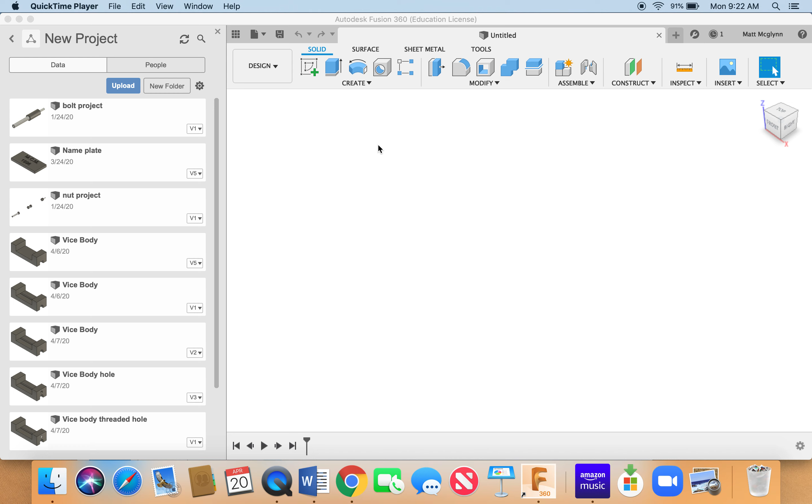I want you to open up Autodesk Fusion, go into Create, and create a sketch. We'll select our plane here and start with creating a circle - a center diameter circle, 0.5 inches in diameter.

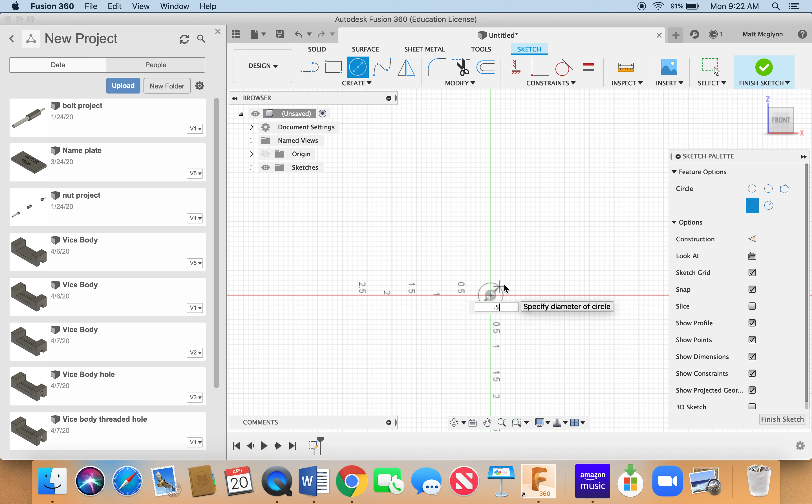Once we have that done, we're ready to create something solid here. We're going to extrude that out 1 inch. Now we should have our circle here.

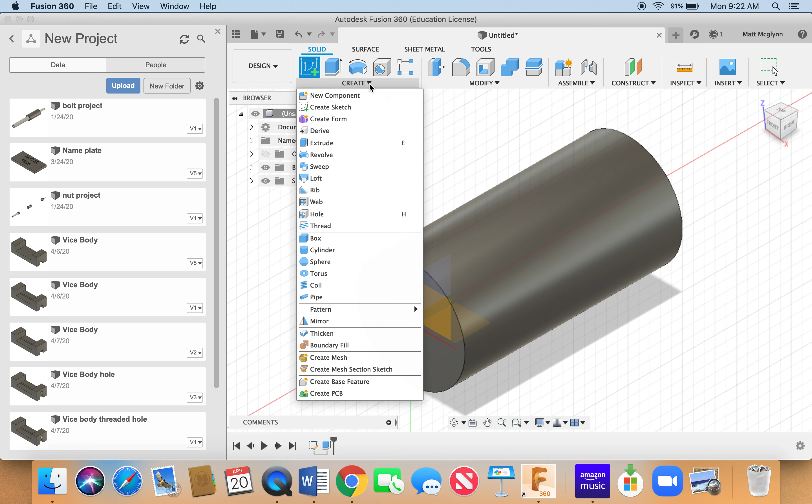I'm going to go back to create sketch, and we're going to start working on our threaded shaft here. I'll select this plane right here and do the center diameter circle again. I've found this works best when we do it in the 3 dimensions, the way I'm doing it. This is going to be a 0.375 diameter circle.

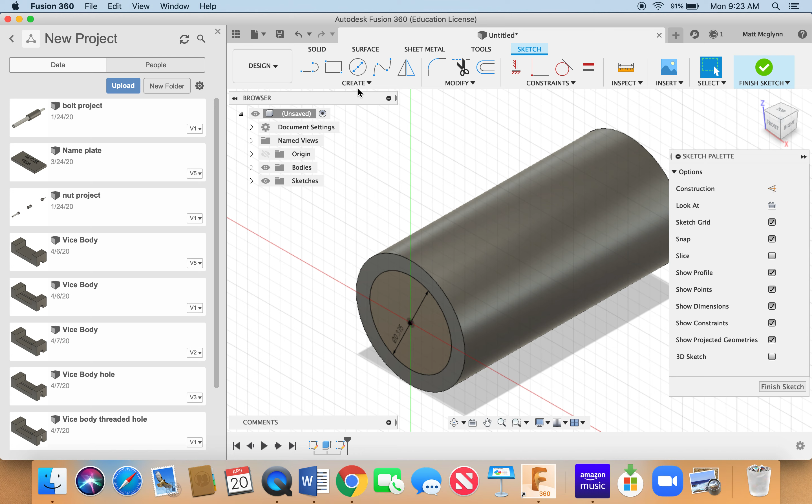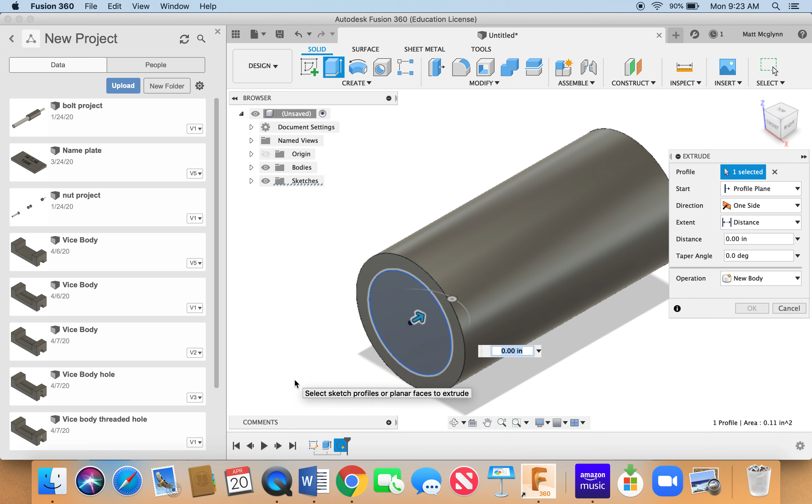Then we're going to extrude that out as well. So I'm going to go to solid, extrude, and notice the arrow is going in that direction - we don't want that, we want the other direction, so that means it's going to be a negative number. We want that to go 3.5 inches, so we'll type in negative 3.5. Enter, and we'll take a look at that.

And then we've got our little tip on our shaft that's going to lock it into the vise jaw.

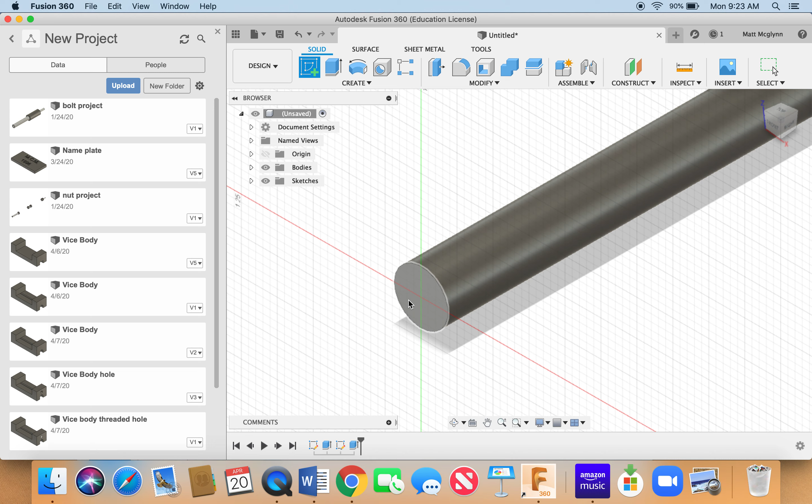So once again, we're going to go to create sketch, select this plane, and I'm going back to 3D again because for some reason it seems to work better in 3D. I'm going to select that center again, and this circle is going to be 0.187. Enter, and then once again we're going to extrude that.

I'm going to select that center, and this time it shows the arrow going this way for some reason, which is fine. We're going to extrude that 0.125 out.

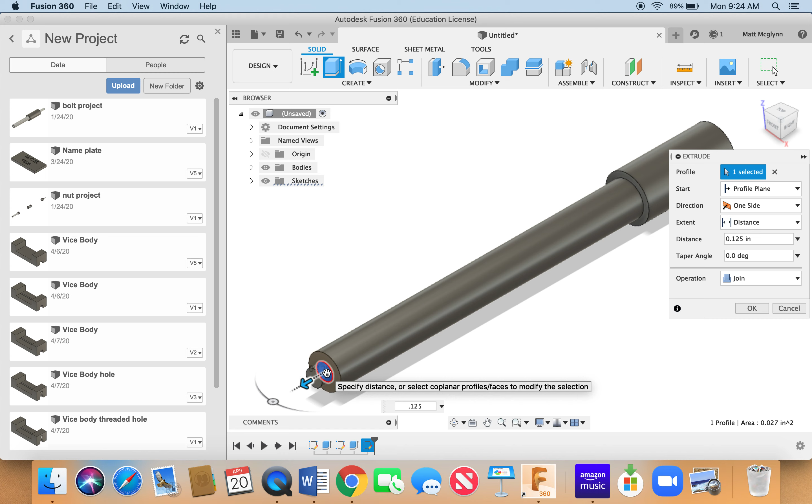Enter, and then we're going to draw another circle there again. So once again, go to create sketch. There's the plane that we want. It puts us back - once again, go back to 3D again. Circle in the center, and this circle is going to be smaller, 0.125. Enter, and I'm going to zoom in on that a little bit, so it's a little easier to get a hold of.

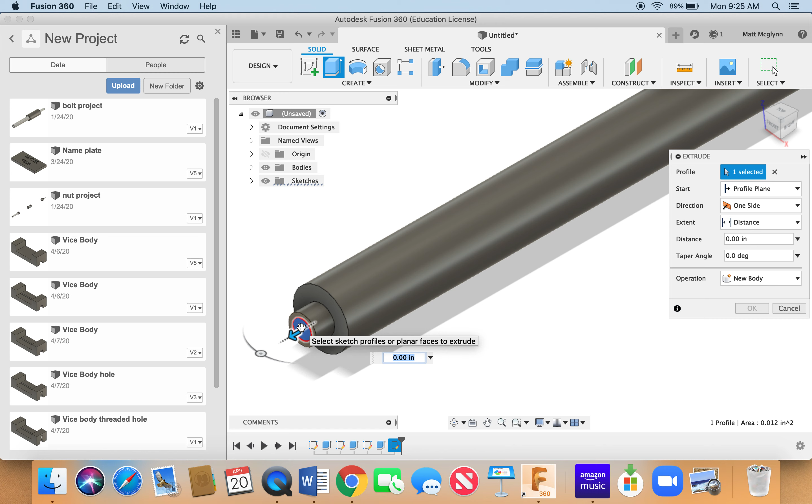Then we're going to go back to solid, click on extrude, and I'm going to click on that circle I just drew. Once again it's pointing in the right direction. We want this to go out 0.125 as well.

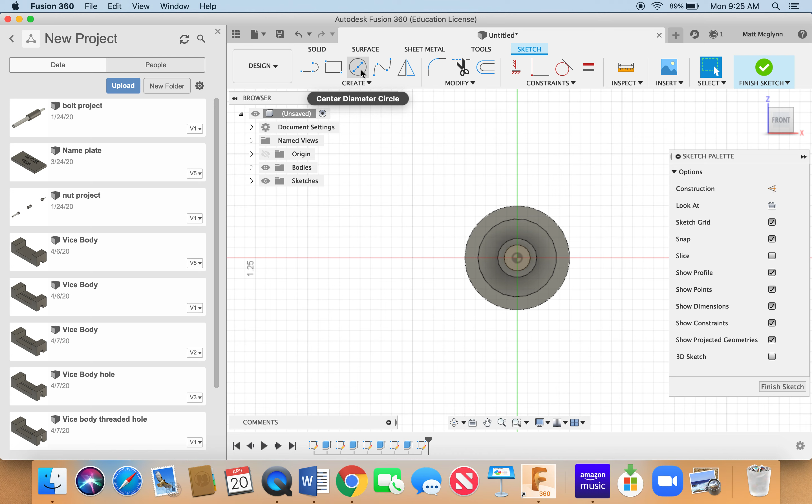Enter, and then we're going to draw another circle here on this end. So we're going to create sketch again. This is the plane that we want, and we're going to draw a circle. Once again, I'm going to bring it back to 3 dimensions.

Zoom in here. There's a center point of our circle. We want this circle to be the same as our original, 1.187. Enter, and then we'll go back to solid here.

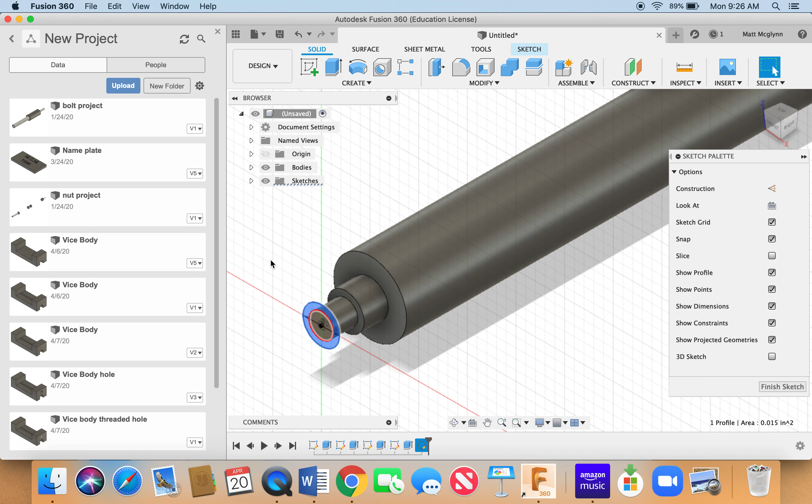I'm going to select that outside face, and we're going to extrude that 0.125. Now I noticed that it didn't extrude the center part of that, so we'll go back in here and do that. So I'm going to flip it back to the front,

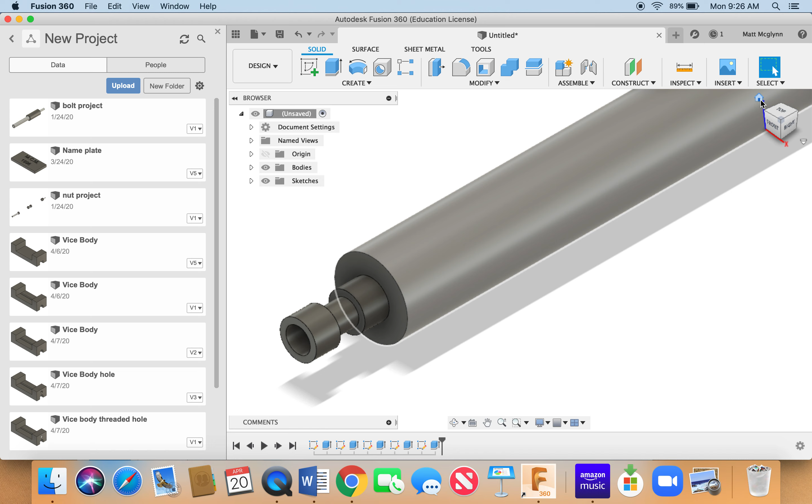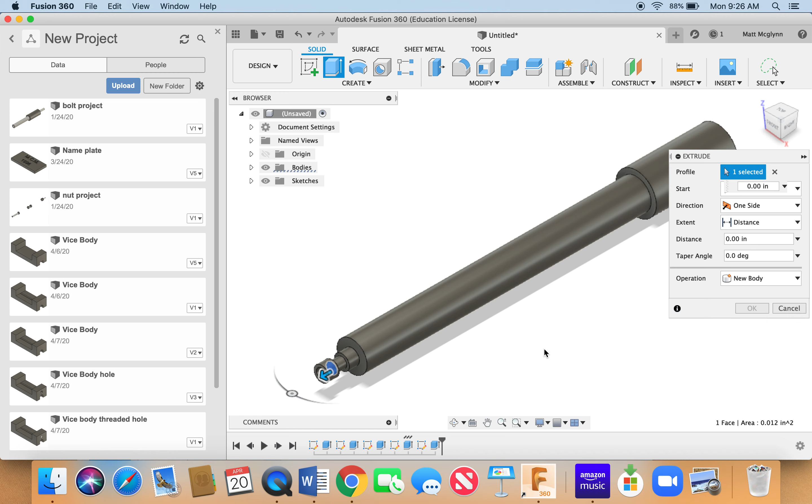and we'll select that middle circle, then hit extrude as well there. I'm going to go to home to see which way it's going to put it - yeah, that's the way it's going to put it. So we'll type that in, 0.125 as well. There we go, there's our distance. 0.125. Enter, and there we have our part.

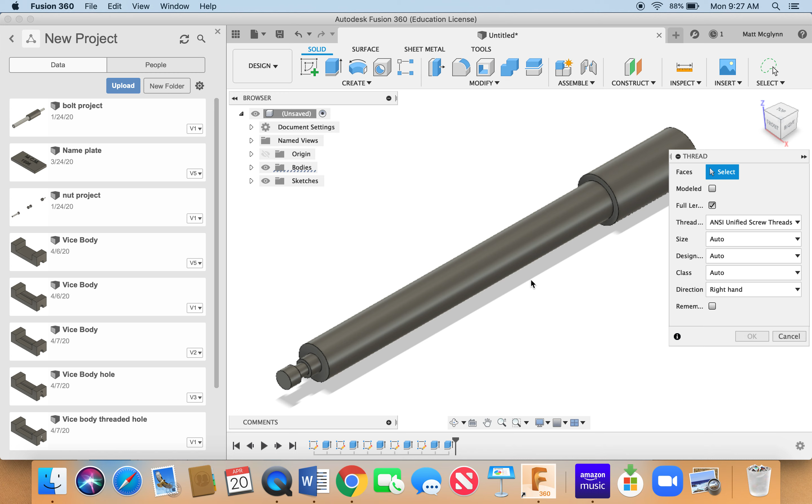Okay, last thing we got to do is we need to thread this shaft. So I'm going to go to Create up here and create a thread. We need to select it - I think it'll automatically size them. Yep, 3/16 is what we wanted, so it automatically sized the threads for us. Can't get much easier than that.